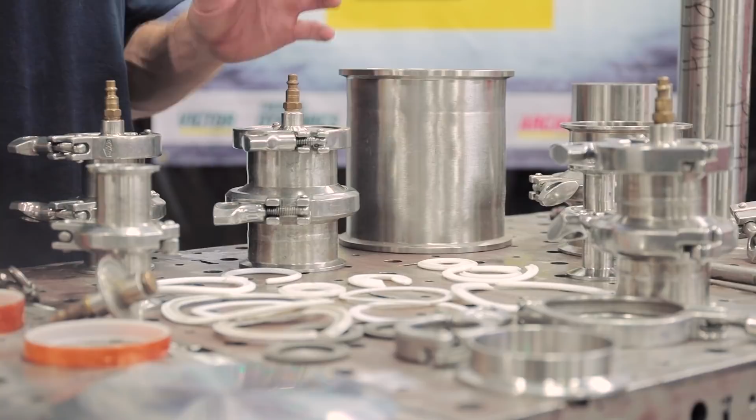I'm going to take you through how to set up a purge. I've worked several years in the food, beverage, and pharmaceutical industry. I'm going to take you through a series of videos going through a number of processes you'll encounter in real life scenarios in this industry. But today we're going to go through how to set up a purge. Let's get at it.

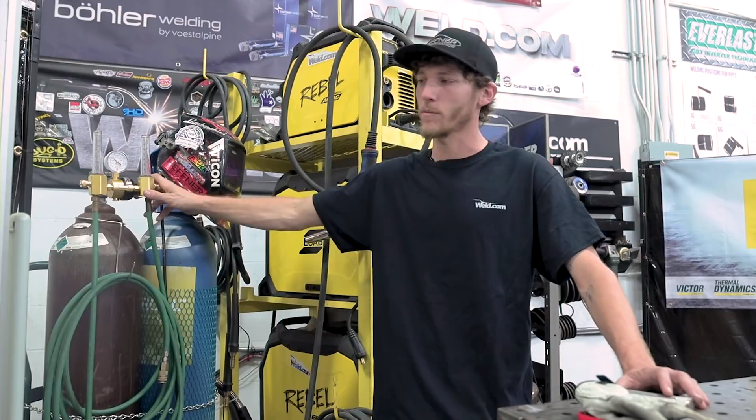So I'm going to go through some of the setups I got and what I use to do the jobs. Over here I have a Smith Equipment dual flow meter regulator. I've used these for years now. I love them. They really regulate the bottle pressure and the flow rate. Awesome. Some people will use individual flow meters and put them on a T-block and use them on the same bottle. If you don't have a T-block, you can use two bottles and run two individual flow meters as well.

I've got the green argon hose here that I use. I've got a quick connect set up on them. All my purge plugs are set up with quick connects to ensure that this doesn't just pull off of a hose barb or anything like that. It really gets a nice seal to make sure and ensure that all oxygen is out of the pipe and we don't get any oxygen impeding in there as well.

I'm going to go through some of the different purge plug setups and things you can use to set up your purge, as well as things you'll encounter in real life situations that you need to know when purging tubing and pipe out. There is a process to this, and you need to know these things in order to have 100% proficiency in your welds to ensure that these field welds are made good and these bench welds are all made good. I'm going to take you through a number of different things you can utilize for purging.

I'm going to show you some of my personal purge plugs that I have here with a various number of sizes and clamp connections, I-Line ferrules, tri-clamp ferrules, as well as I'm going to show you the other things you can use to set up a purge, different tapes, metals, things of that nature.

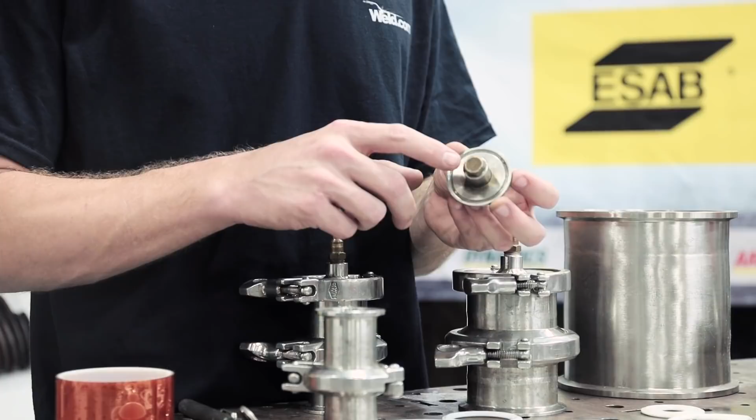So what I have here are a bunch of tri-clamp and I-Line fittings. You can see here, all my purge plugs utilize a brass muffler or diffuser. This is going to help the argon act as a column to evacuate any oxygen out of the pipe. As opposed to, if this wasn't here, we could blow a stream of argon and actually trap oxygen within the pipe, which we don't want.

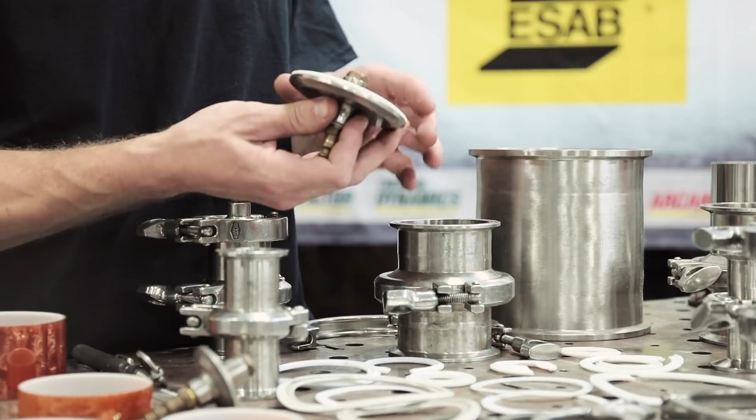So here I have a tri-clamp and I-Line fitting. Mainly you'll encounter in the process industry is tri-clamp fittings, but you also will utilize I-Line fittings as well. It's a male-female setup, so if I have a male fitting or a female fitting that I've got to weld to, I can just take my tri-clamp end cap here and put it to whichever side I need to adapt to make the purge and ensure that I have a good seal on there.

I utilize these Teflon gaskets that I've acquired over time because they don't burn up and I can ensure that there's no oxygen that's going to get pulled in here. As well as I have some you'll see with slits in them, and I'll take you through that later on in another video about actually back purging something when you have a dammed piece of pipe that's not open-ended, that you can't evacuate the oxygen out of.

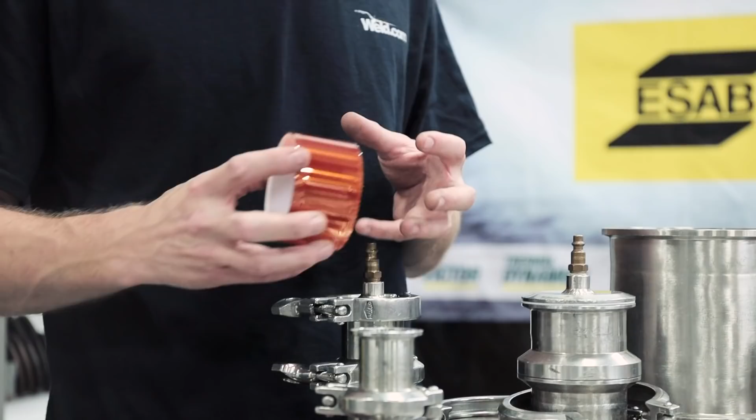So we have the I-Line, the tri-clamp fittings, commercial grade silicone rubber purge plugs that you can use. You can use balled up aluminum and stick it into the end of the pipe, as well as I have heat tape here. I'm going to demonstrate that here for you today and show you how this stuff is used, as well as what you're looking for in a weld.

So I'm going to tell you what it means to purge pipe and why we do this. So essentially what we're trying to do is evacuate all oxygen out of the pipe to ensure no oxidation. So that entails backing the material with the argon. We're going to need to pressurize the tubing as well as vent it to allow the oxygen to escape.

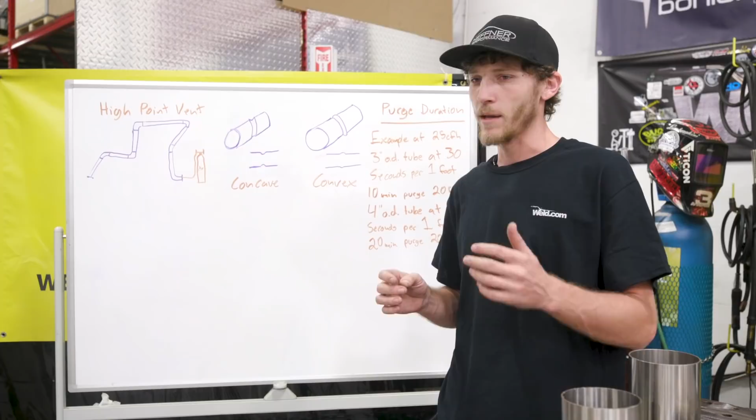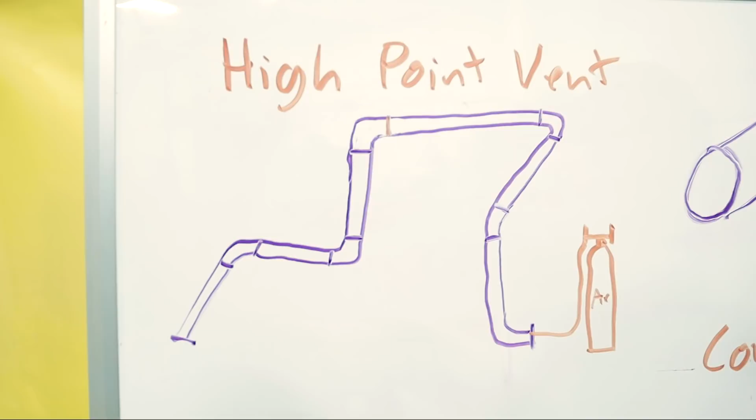I'm going to go through some real life situations and things you'll encounter and what you need to look for when doing so in prep and in your welds. So here we have a high point vent. When you're going to purge this long run of pipe, you have a high spot in it, and the argon is going to fill up essentially from the bottom up.

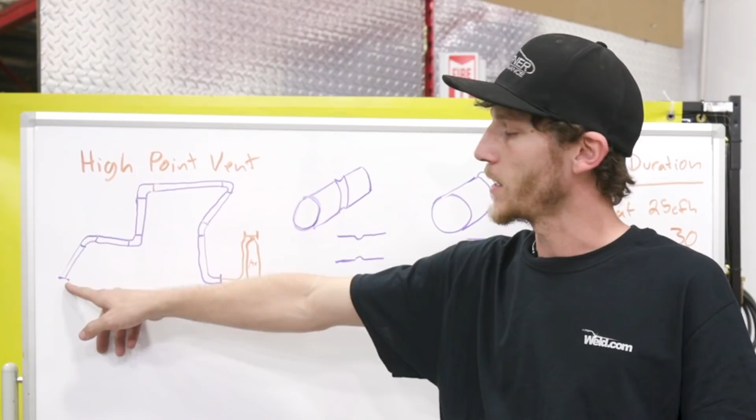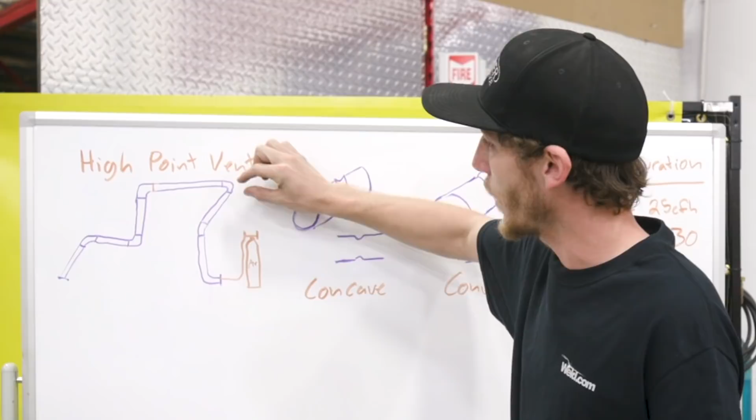If you don't have a high point vent to vent that oxygen out of, and you think you're just going to be able to vent at the end of the tubing here, you're wrong. That argon is going to fill up the low level and then just start to fill up from the low side again once it travels through the high point, so that oxygen will actually get trapped at the highest most part of the pipe.

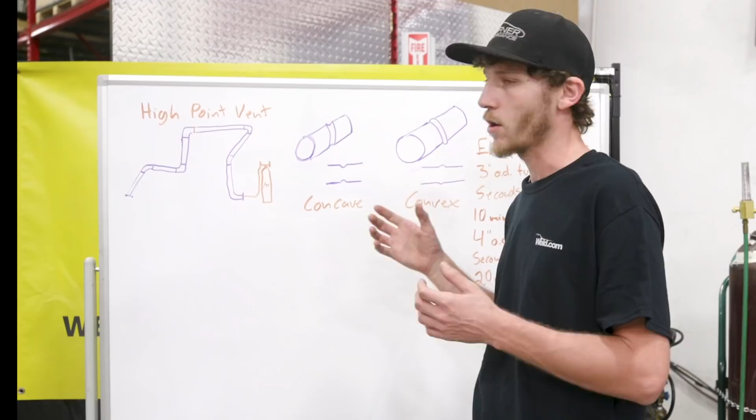I've encountered this in real life where my welds will become concave because I don't have the argon backing it, and that weld will actually sink in. Then you have a bad weld, and you got to cut that out.

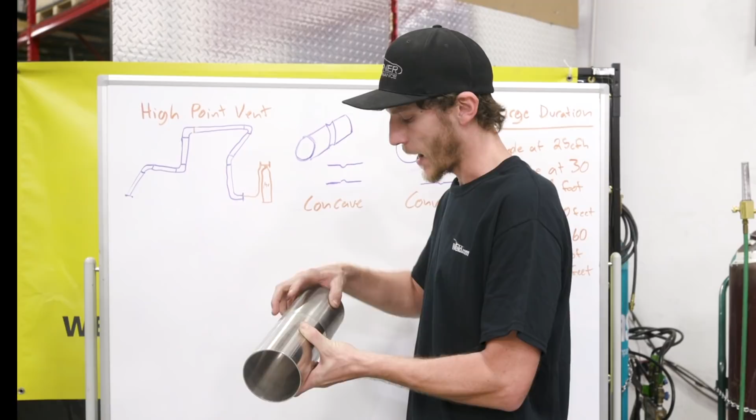So essentially what I like to do with fitting these high point vents is I'll take a file and actually notch a little vent hole in it. So when the tubing is mated together, I have a vent hole, and that'll be at my highest most point to ensure that oxygen is able to evacuate out of the pipe here, because we don't want bad welds, especially up in the pipe rack.

And like I was saying, that can cause a concave weld, which we don't want. You know there's a problem there, so we're going to have to address it.

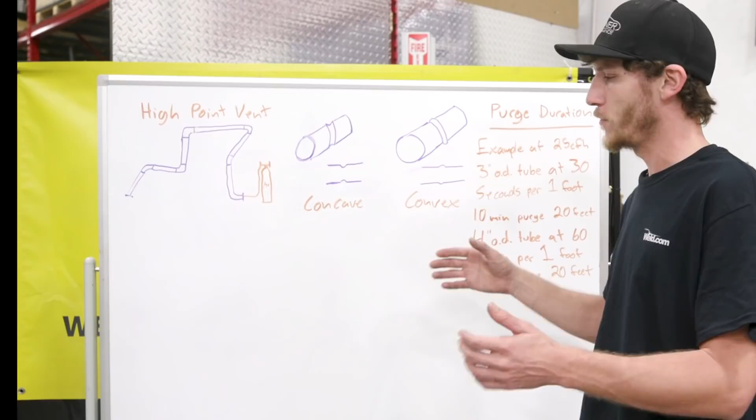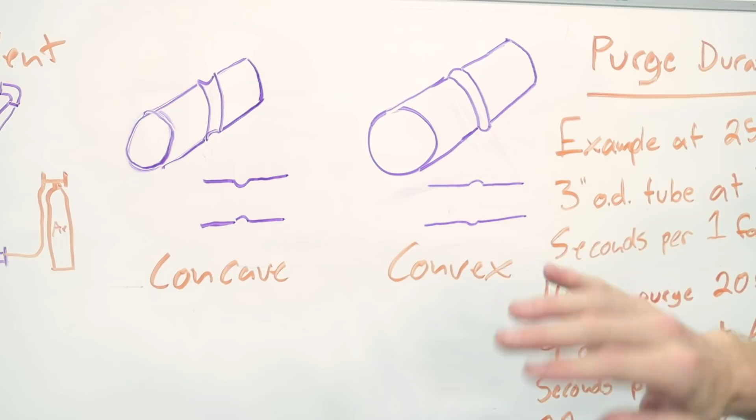Another thing to look at when purging this stuff, if you have too much back pressure, if your vent hole is too small or your purge flow is too high, you'll have an actual convex weld and it blows that out, and it'll look like you almost got a cap on there that you put on it. And that's not a good weld.

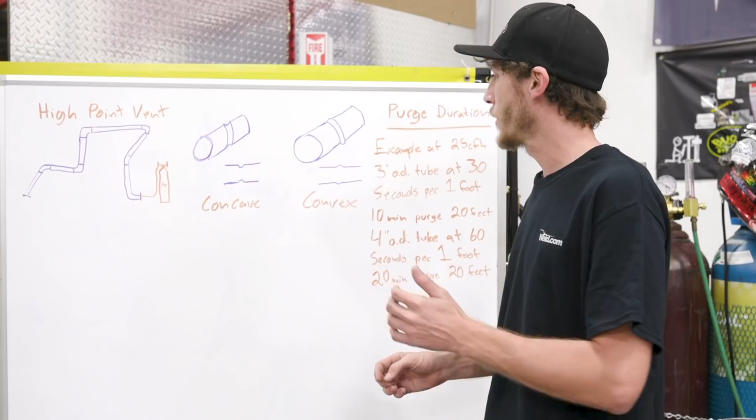You're going to have a spot within the pipe there that now bacteria can settle in and build up in. So that's not needed, that's not what we want. We want to cut that out, replace it, and fix it. These are the things I'm trying to help you learn to prevent from happening.

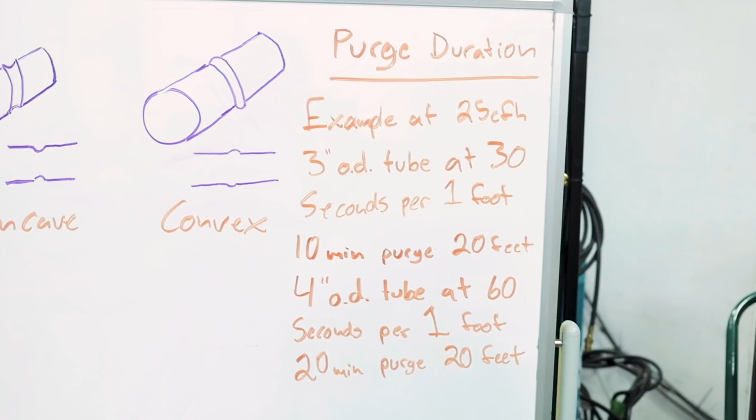So now we're going to go into the purge time duration. This is just a couple examples of what you'll frequently see with a lot of 3-inch tubing, and it gives you a good reference point to start with to know how long you need to purge your pipe. I'm going to show you the chart as well that shows you all the various sizes of tubing and how long it takes at what CFH level to evacuate the amount of volume within the pipe.

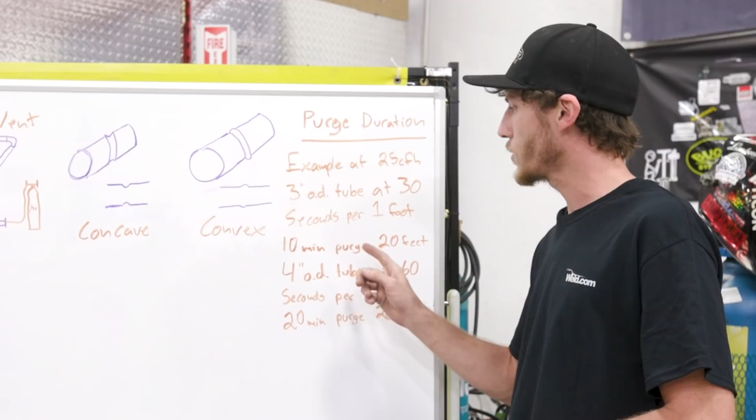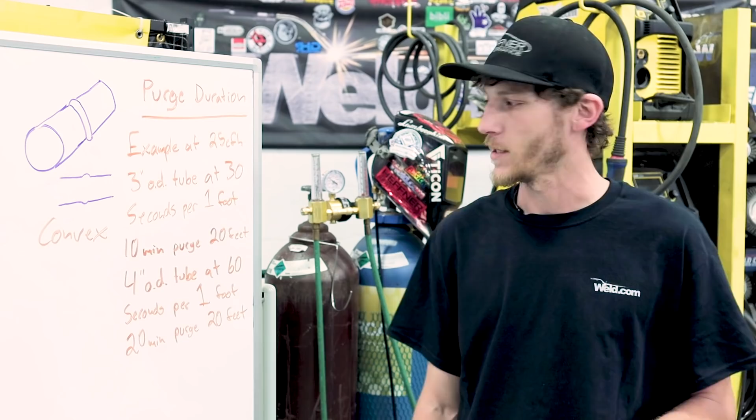For example, at 25 CFH, we have a piece of 3-inch OD tube. At 30 seconds per foot is what it'll take to evacuate all the oxygen out there essentially, 30 seconds per foot at 25 CFH. So in a 10-foot or a 20-foot run of pipe, it would take essentially 10 minutes to purge out that amount of volume of tubing. I always like to let it go longer than that to ensure that I have a good back purge on there.

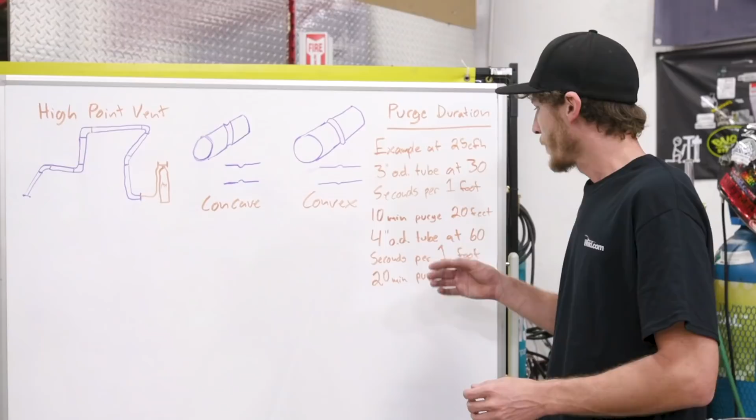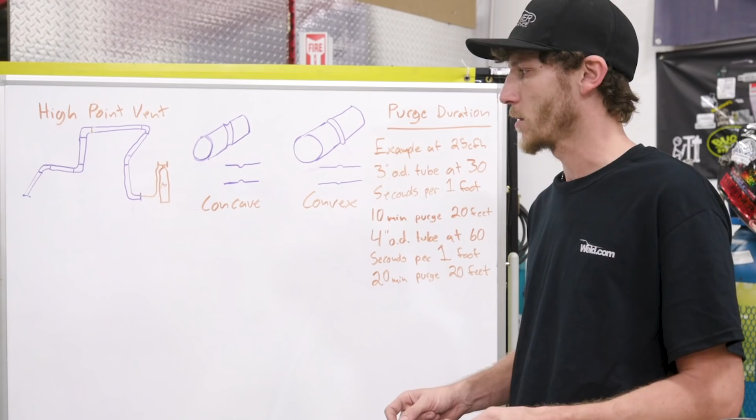4-inch OD tube is about 60 seconds per foot. So on a 20-foot run of pipe, it would take about 20 minutes to purge out a 20-foot run of 4-inch tubing. From there, I'm going to take you through what we need to look at quality-wise as well, making these purges and showing you what is acceptable to passing.

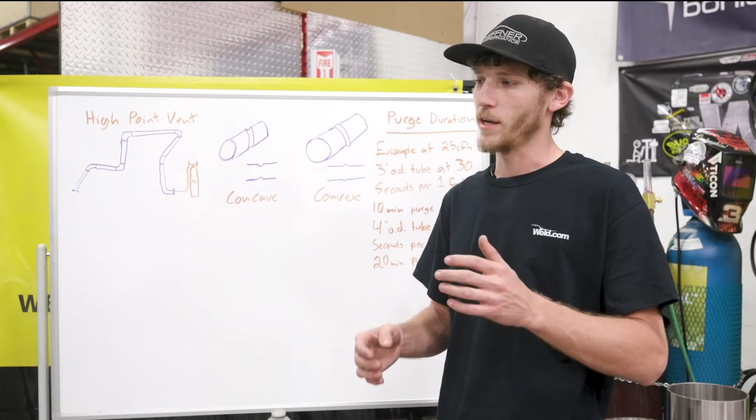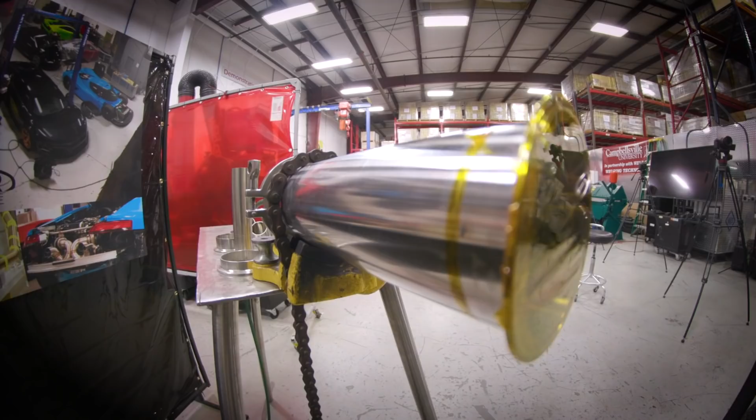You want a good back purge, and I'm going to show you a chart as well that'll show you the ranges of coloration on the inside of the purge that you're going to be looking for. So we're going to get a purge set up on this piece of 4-inch over here and get a weld going, and then we're going to assess it. So let's get at it.

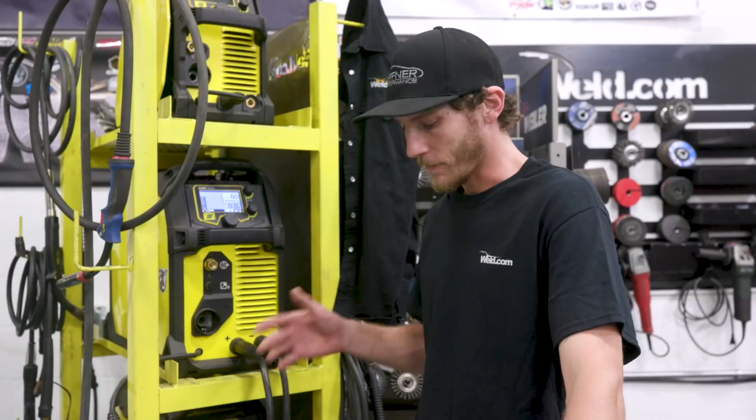All right, I'm going to go through my machine settings, but first I'm going to show you how this torch is set up. This is going to be what you're going to see out there in the field when working in the food, beverage, and pharmaceutical industry. You're not going to see guys using a finger switch or a foot pedal.

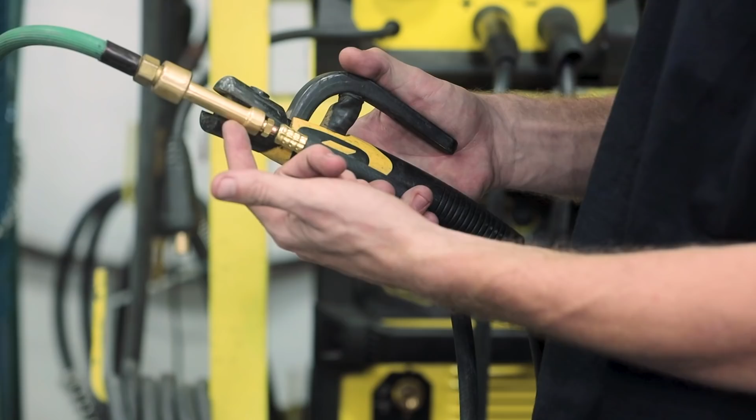Most of the guys run a suitcase welder, a small size welder that you're going to be utilizing. So we're going to have the machine set on a stick setting. You take the stinger to this argon block that you can have a bolt connection up to, or just put the stinger directly to it. You won't see this in the field because there will be a boot that encapsulates the whole thing to ensure that it doesn't arc out on anything.

We don't want anything happening or to get arced up, so you'll always see a boot over this. This is going to be widely used, something like I said you'll see common out in the field there.

We're going to utilize the ESAB EMP 235 IC machine here, got it set on stick. For this machine, you got to have the volts on for the lift arc to work. I'm going to be running a piece of 4-inch OD tube here, so I like to run it at about 60 amps. 3-inch and under, I'll run it about 45 amps, and 1-inch and smaller, I'll just have to fine tune it and turn it down a little bit.

Now that we got the machine set up here, I'm going to go over and talk about the regulator a little bit and my flow rates in what I do when welding out a piece of pipe under purge.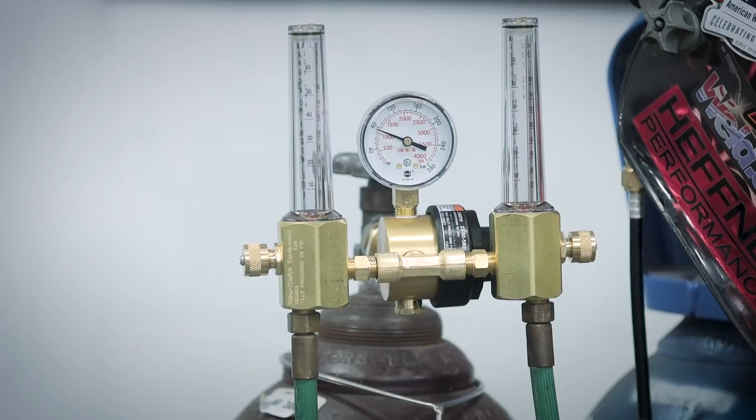So come over here and I'll show you that. Now I'm going to take you through how I have my regulator set up and all my flow rates. So like I was saying, you're never going to see anyone really out in the field using a foot pedal or a finger switch.

You can run the machine if it has the solenoid built into it, so it triggers the argon on the solenoid and you don't have to turn this valve on. This is what I'm used to using, so this is what I'm going to show you today. The valve here turns the gas on and off. I'm going to go ahead and set my flow rate.

Usually doing this stuff in the field, you're outside, so the elements are a factor. So I like to have my argon flow set real high so none of the wind will impede and blow my arc out, because then you get oxidation in your welding. It's bad.

So I'm gonna open this valve and set the flow rate right now. We're indoors, so I'm gonna set it at about 50 CFH here, and that should be plenty enough.

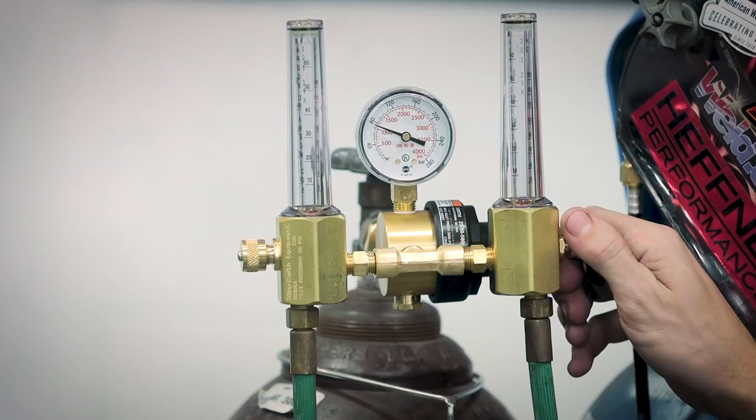When I set a purge up, from experience, I know what size of hole I want to vent with out of the tubing. So when I'm purging and I want to just evacuate the oxygen out, I'll set it at 25 CFH — a faster flow rate to help get more of it out. Time is of the essence and we want to get that oxygen out, but we don't want to mix it, so we're not going to blast it. We just want to steadily evacuate the oxygen out of the pipe.

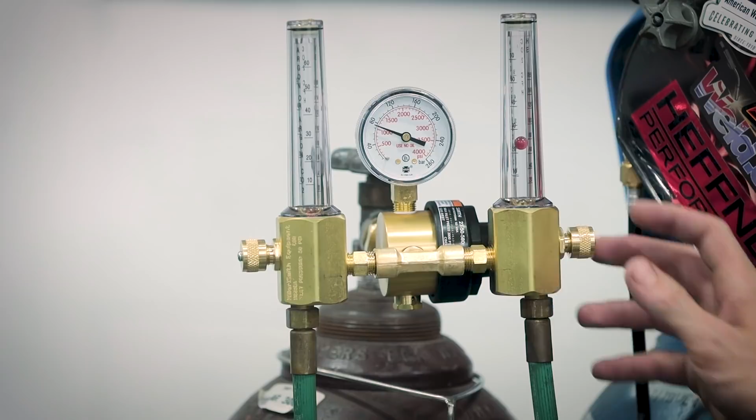But when I go to weld, the back pressure within the tubing, along with the hole size and your flow rate, is going to dictate the concave and convex of the weld because of the back pressure that builds up within the tubing. So I'll usually turn it down to about 20 CFH, and that's what I like to weld at.

From there, we're going to leave this purge on and get this piece purging, and then I'm going to take you more into the things I'm looking for when actually making a bench weld doing this type of weld process.

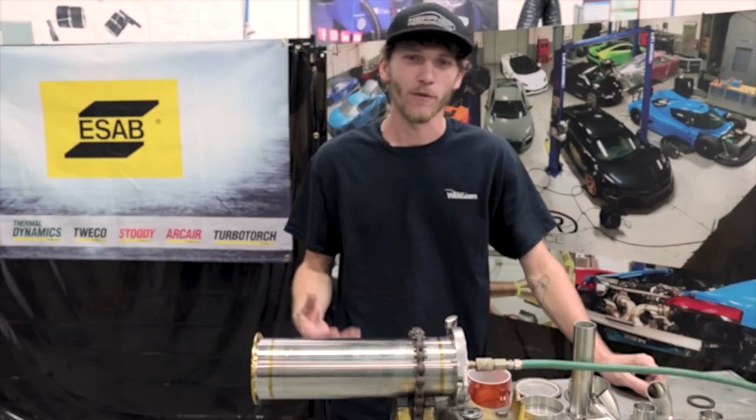So we've had the purge running for a couple of minutes now. This thing should be well purged out. I just wanted to go through a couple of the different things we utilize to cap off the end of the tubing with when purging.

Like I said, I like using my clamp-on style purge plugs the best. It helps really keep that ferrule from deforming, and it ensures a good seal so I'm getting a good purge on the pipe.

What I'm going to use today is the clear tape. That way we can give you a good visual of what it looks like on the inside of the tubing while it's breaking down, as well as show you some of the other things you can use.

You can use the commercial grade silicone rubber purge plugs. You can use aluminum foil — people will ball that stuff up and throw it in there. If you're not going to put a lot of heat to it and all you have is masking tape or painter's tape, you can utilize that as well. There's also various styles of aluminum blocks that can either get clamped on there or wedged onto the inside of the pipe.

We've got this thing purging now. I'm gonna go ahead, get my hood and jacket on, and we're gonna make a weld here and assess it. Let's get at it.

All right, so we've had this thing under purge for several minutes now. As you can see, I've got my high point vent here to get all the oxygen out. We're not gonna be spinning this pipe out at all here on the bench. I'll get into spinning out pieces in another episode, but right now we're going to keep this piece of pipe stationary because you don't always get the luxury of spinning things out. It's nice sometimes where you just stand there and spin a piece out, but it's not always feasible.

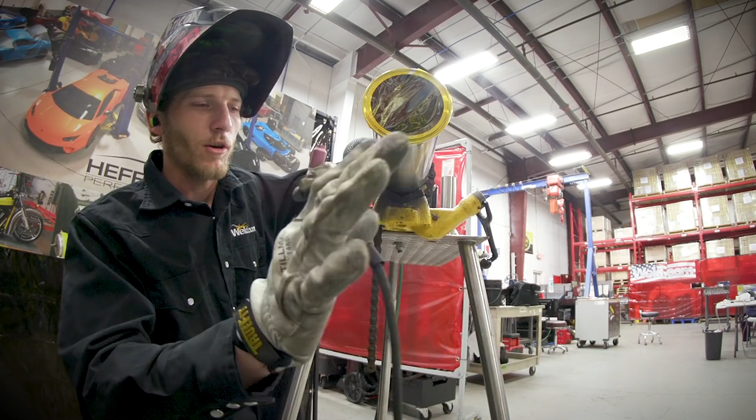So I'm going to go through what I do to set up to make this easier. First thing, when walking the cup, there's going to be a lot of movement within this TIG rig, and this lead will play a factor in that movement, and I don't like fighting that. So what I do is take my arm, reach over the lead and then back behind it, so the weight of it is on my arm and not within the torch right here.

That being said, I'm going to start at about 5 o'clock, and when I get to the other side, I'm going to tell you and show you how I tie back into this spot.

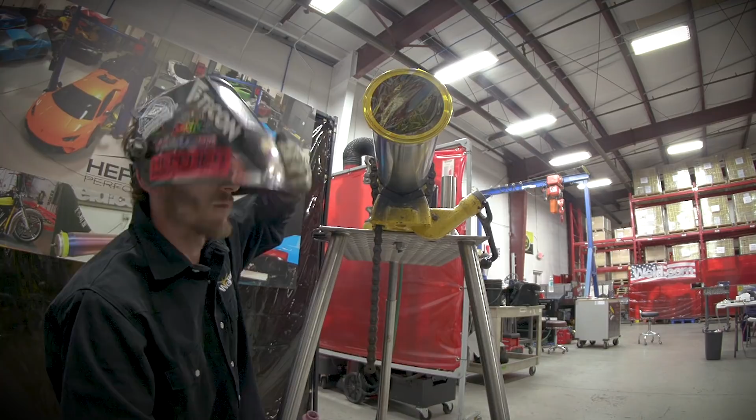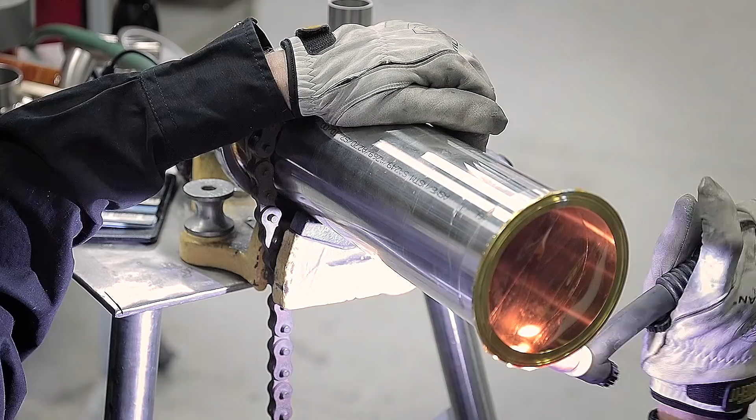So I like to sit on it there for a second, let it start to burn in, then start walking that cup. This 4-inch, you can't walk too fast on it. You got to give it enough time to break down. It's a bit thicker than your smaller diameter tubings that you'll mess around a lot with.

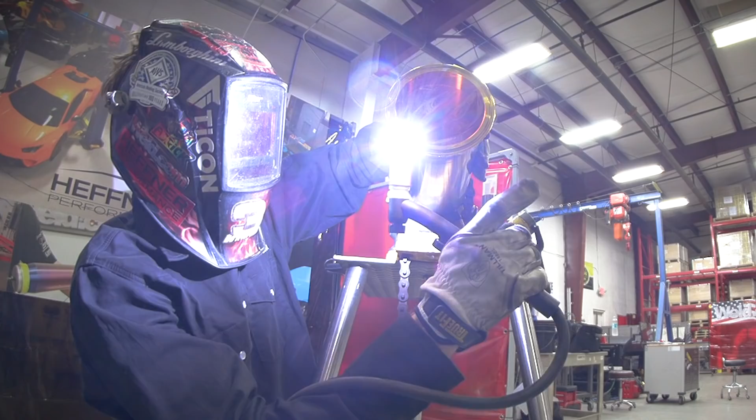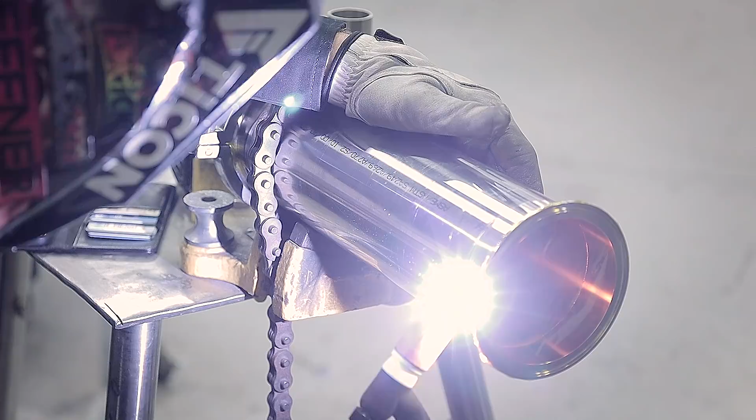I usually weld the 4-inch at about 60 amps to ensure I get a good burn in. Just move at a nice steady speed. All I'm really looking for is the swirl in that puddle, as well as watching the edge of my puddle. I watch the edges of those puddles fall to each side, and that's how I keep a uniform weld. I don't want it real wide, I don't want it too narrow. Just be consistent.

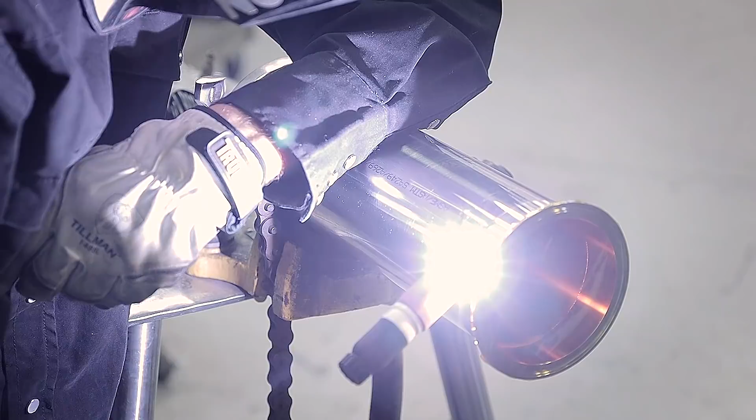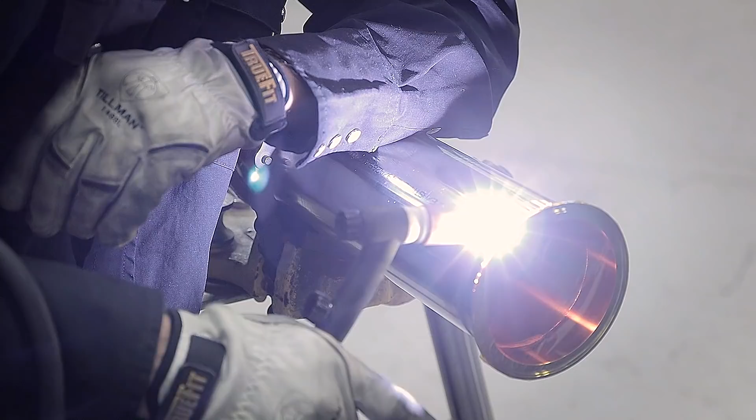Now when I come up here onto the top side, to make my tie-in easier, I'm going to take this weld as far as I can, just to make it a little easier for me on the back half when I go to tie back into it, because sometimes you're in a confined space where you're limited on space, whether it's the way the pipe's oriented or the work environment.

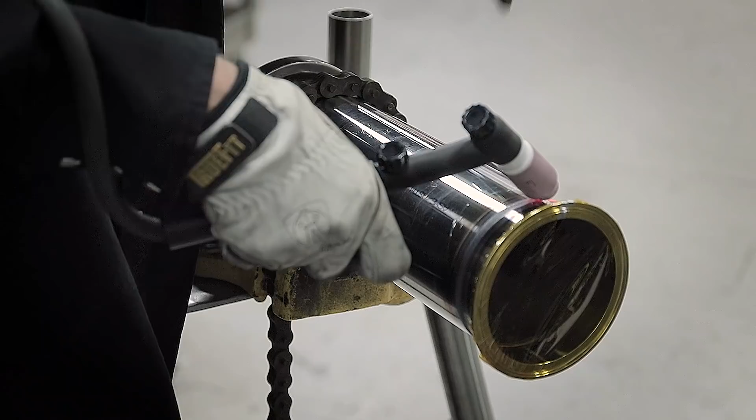Now when I go to snap out of this here, I'm just going to tilt back on the rig a little bit and walk a little faster, and you'll watch that weld taper off. Snap out of it, and you'll get a nice tail.

Alright, like I said, started at about 5 o'clock here. Now to ensure that I get penetration back on where I'd started, I'm going to overlap an inch. That gives me plenty of time to let that weld start breaking down so I don't miss a spot in there. Same thing when I get to the top side, I'm going to go past it an inch to ensure that I've overlapped and we didn't miss any spots in there. I'm also going to take the stainless steel wire brush on my start and stop points to clean those up a little bit too.

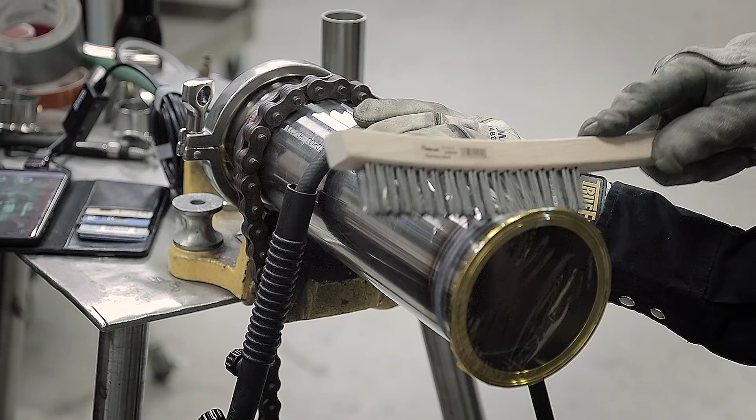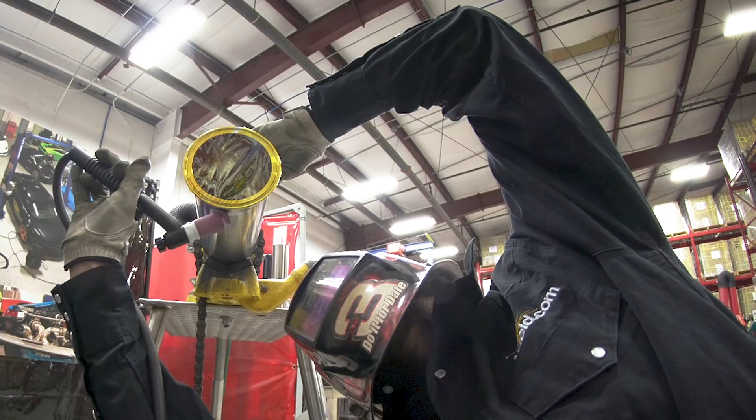Alright, let's start back here about an inch overlap. Let it burn in for a second. Start moving.

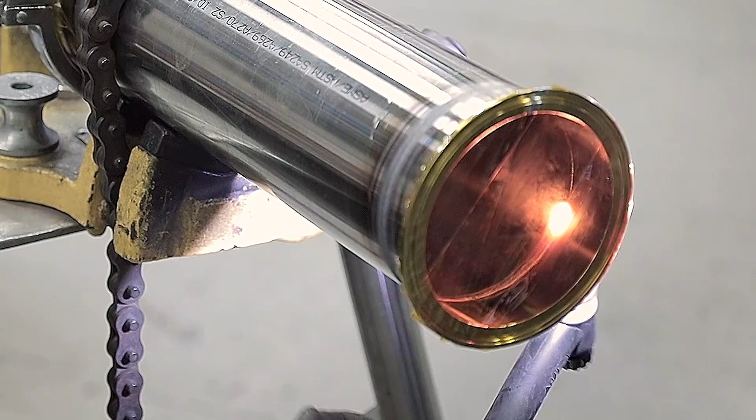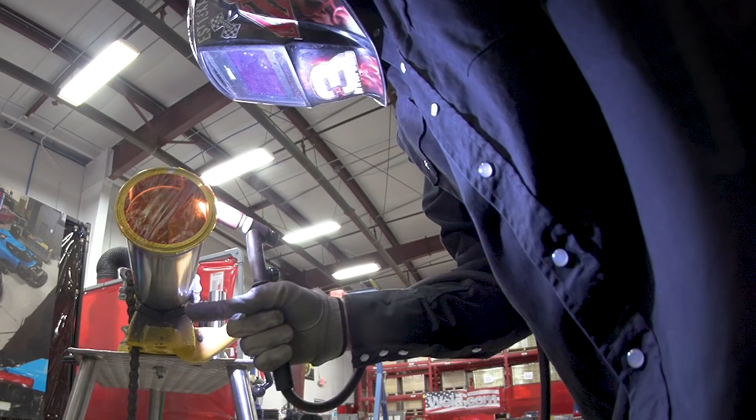Also, be sure when you're welding this stuff, you've got your argon hoses laying around you. Be sure not to step on that thing. You do not want to stop the argon flow on the inside of the pipe here.

So, coming back onto the top here, once again, getting out of this weld is going to be very important. We don't want any fish eyes in there. So as I talked about before, snapping out of this thing, you're just going to lean back on the rig a little bit and then start to walk a little faster, and you'll see that weld taper off. And then when it does, you just snap out of it.

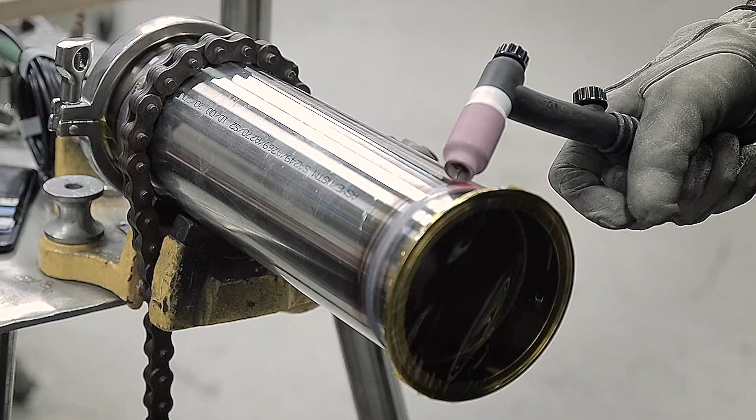Hold that rig there for a second, help cool that spot. From what I can see here, looks like it's a good weld. Let this cool, we'll take a closer look at it.

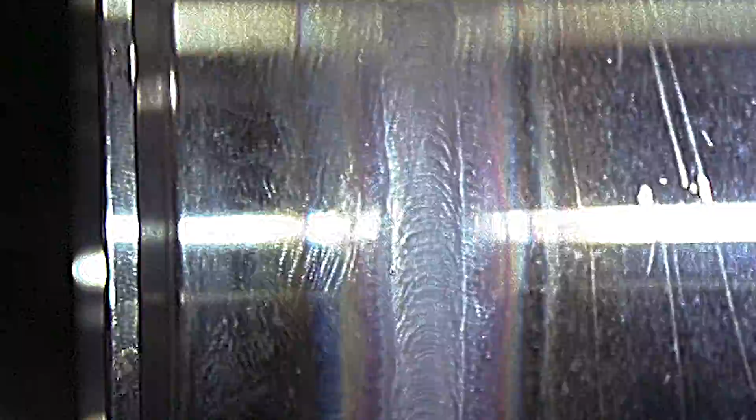Alright, so we got the weld done here. We're gonna go ahead and inspect it. Got my telescoping inspection mirror here. As a welder, this is something you're gonna want to have in your bucket. If you can visually inspect every weld, do so. That just gives you a better knowledge of how proficient your welds are, knowing that every time they're on point. I know down a run of pipe in the field, you might not be able to inspect that weld that's 50, 60, 100 feet, however long down the run of pipe. So you need to ensure that weld is good, and by inspecting every weld you can, it just ensures you that you made a good weld.

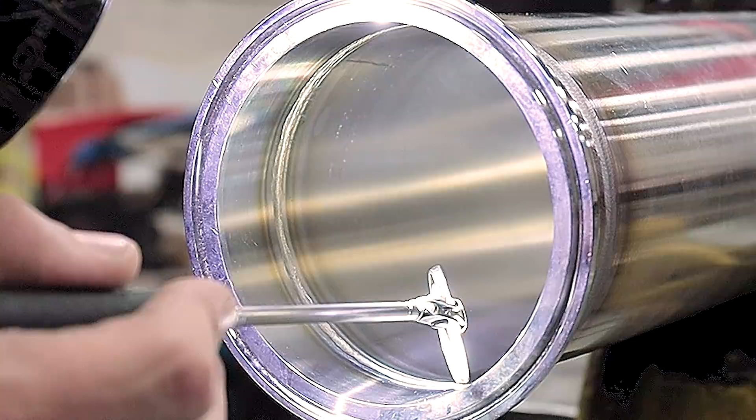So got my mirror here, gonna grab the flashlight, take a look at it. Nice and silver in there, really good. I like the consistency through the weld, as well as how flush it is. I don't have any concave in the weld, it's not convex at all, it's nice and flat. That tells me that my back pressure and my purge with the vent hole were pretty on point, as well as I had enough argon in there to help cool that weld at the same time.

So with that being said, this is how you would set up a purge and some of the things you want to look for when doing so.